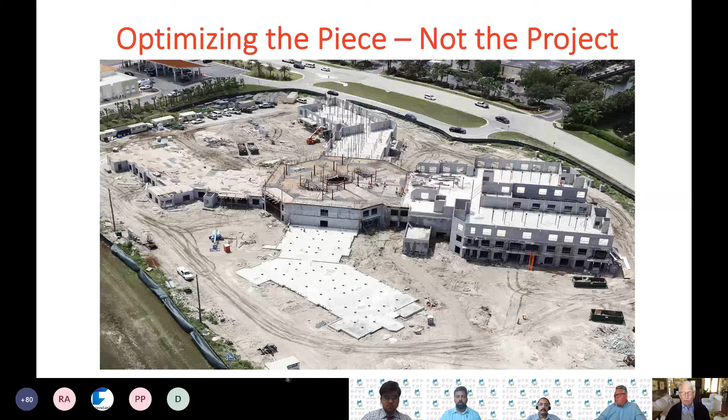So they took up about half of the schedule and left the rest of the trades a shorter schedule to try to get done, which leads to that overburden that Tony was talking about. This is another instance of too much focus on resource efficiency.

This project, nobody understands why. It was down the street from one of the projects I was coaching. It was a large multi-use site, 6 or 7 different buildings to go in, about 5 stories each, but they put up all the columns first, and they didn't follow that with slabs on top of the columns. There was nowhere else for anybody to go to work because they were trying to maximize their resource efficiency.

A direction through the building would be chosen, and every trade would follow the previous trade in that direction, and it would be smooth and things would get done very well. But often things go wrong with that, and we call that variation.

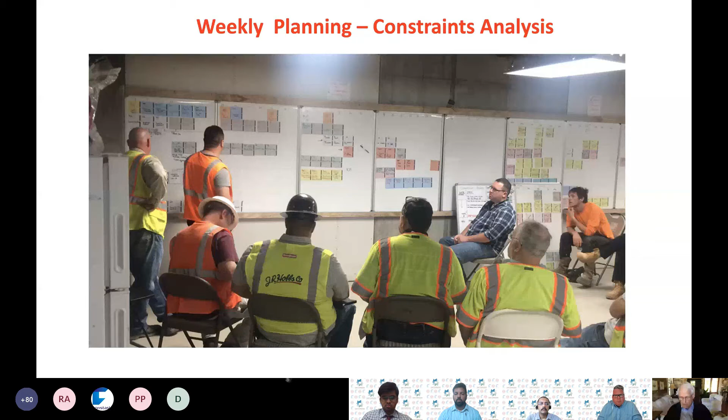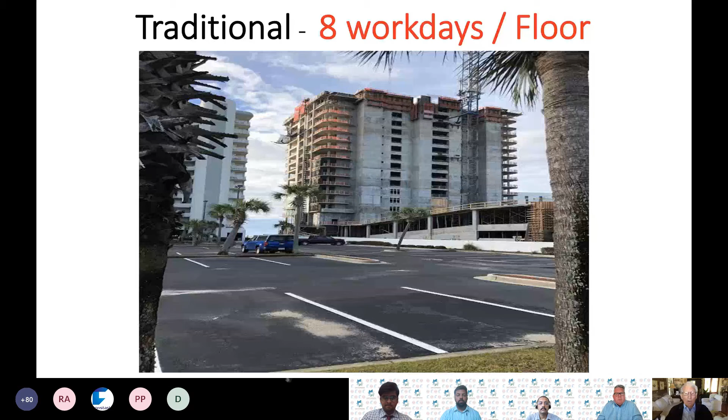This is a project I coached, a company that had not been doing lean at all, and they were raising this building 1 floor every 3 days using lean and the last planner. So 1 floor every 3 days — it goes up very fast.

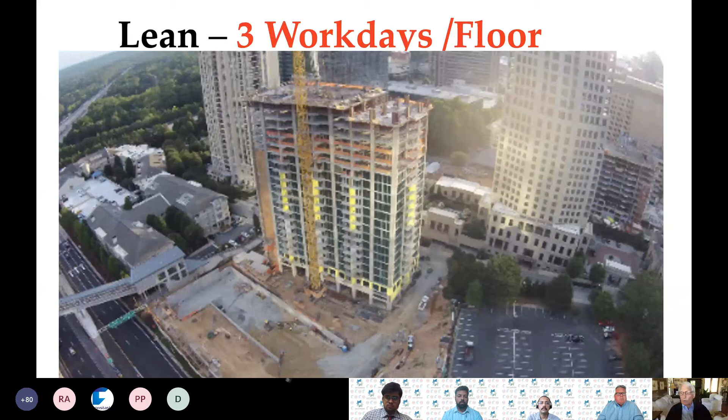In the background to the right, behind the tall building, is a building of the same size and the same height, which started first. The project in the foreground is 10 floors ahead of the one in the background, who were not practicing lean.

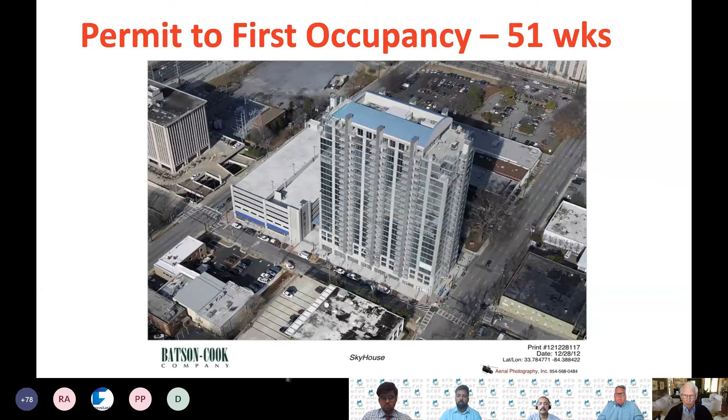The other contractors in that city did not believe that, but yet they built it in less than 12 months — they built it in 51 weeks. And this was the first time they'd ever tried to use lean processes and thoughts.

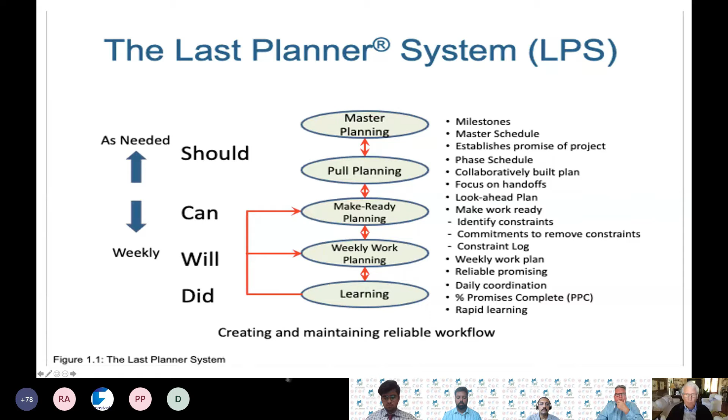And those are the levels of the last planner system. So I'm going to show you some pictures of people practicing the last planner system. The first level was the CPM, and what I like to do is get the superintendent and his assistants on a project to first convert that CPM schedule into a milestone schedule, and just the starts and finishes of each phase of the project.

Often, and most often, when a project in the U.S. gets started, the superintendent and the project manager and their assistants, they arrive at the project at a different time. Usually the project manager knows the schedule and everybody else has to learn it. They learn it in different degrees.

So what we do is have the assistants make up a milestone ticket. That's a diamond-shaped ticket. We have them make up a ticket of the start of the concrete, the finish of the concrete, the start of the exterior, the finish of the exterior. And we have the superintendent place it on a time scale sheet of paper. So it becomes a visual understanding of what that complicated CPM schedule says. It becomes a visual picture, and all of these men that are doing this together begin to understand the project together in the same way.

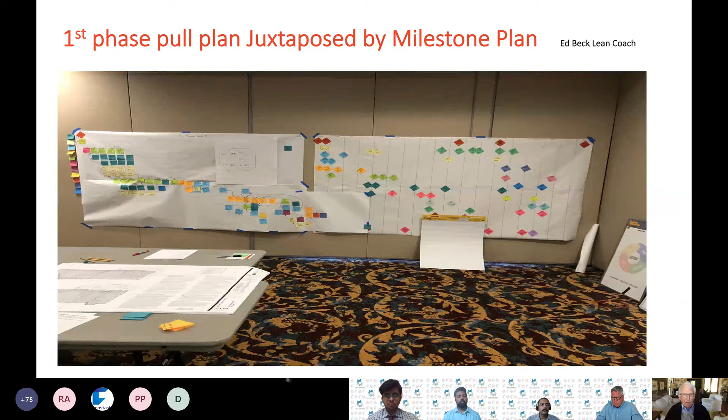So that's this session again. They're planning the order of handoffs between trades, between the plumbers, the electricians, the concrete people, and they're all thinking this job through together. This is the second level of that diagram we looked at.

This is phase planning, or what we call pull planning. This is a very simple use of it. There was a particular project that I helped with, and they couldn't get started because they had a number of temporary roads around the project.

while they moved utilities in front of another building. So we defined, at the left-hand side, 4 different bottlenecks that were keeping them from opening up the site where they could excavate it. So we made a milestone of those 4 bottlenecks to complete them. And then we looked to the right of that and said, what is the last thing that has to happen before we get to that milestone?

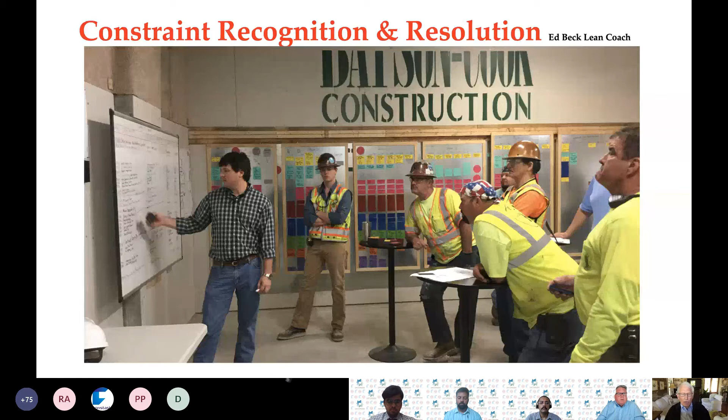So here's a couple of kinds of boards I like. The one on the right is a constraints board. Every time something comes up, we put a date and an activity description, and then we put a person's name who's going to resolve that constraint, and we put when we need to have it resolved, and therefore people leave that meeting knowing they've got an assignment to clear that up.

The board on the left is what I call a bottlenecks board. A bottleneck is the slowest operation in a process. So, for instance, if an electrician doesn't have enough people, then everybody that follows that electrician is going to be delayed. And so we teach people to try to look for those bottlenecks and put them on a board just like constraints and try to help that bottleneck speed up.

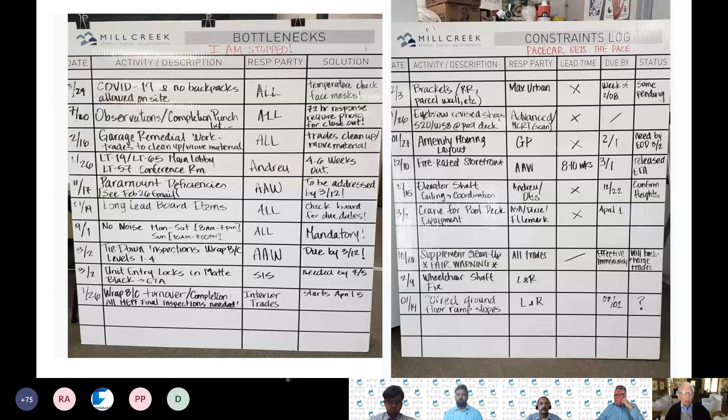Tony talked about these things this morning. This is a diagram that shows you can't start an activity if you don't have the D, P, and the R. The D stands for directives, information. The P stands for prerequisite work, and the R stands for resources.

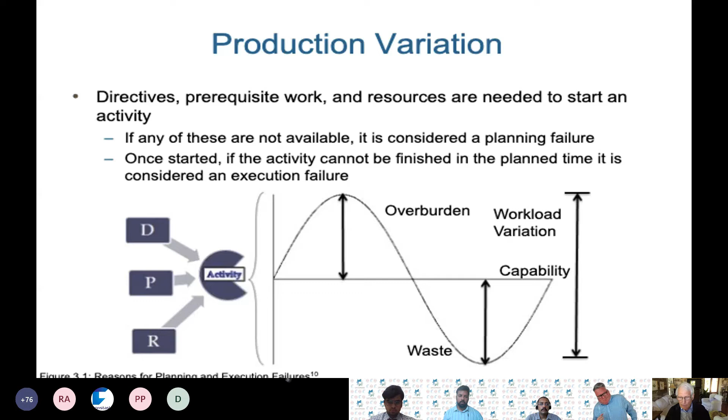A task that doesn't have all those three things shouldn't be on the plan if it really can't be done. So once it gets on the plan, if there's too much work, if it's too crowded, that's when the work planned is greater than the capability and the team is overburdened. If the capability is greater than the work that has to be done, then we're wasting resources.

What we're trying to do with the last planner system is to align what should, what can, and what will be done. And at the end of the week, we can say, we did it, we got it done.

So these big rooms that have all the planning boards on them should also have a key drawing of the project that shows the direction of flow that all of the trades agree to. This is a 42-story building in the United States, and these arrows represent the direction of the flow that each trade will take when they go through the building.

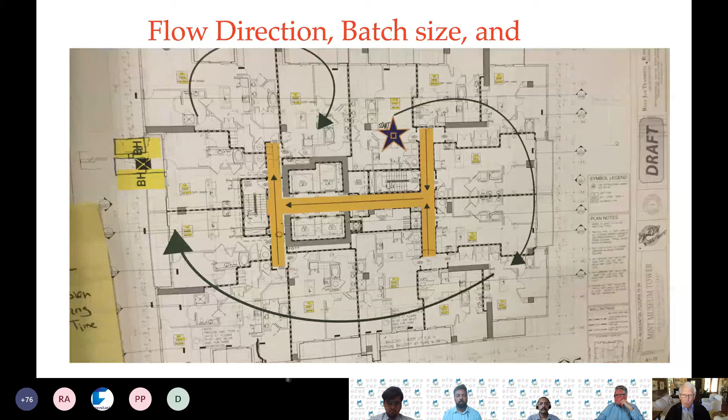So again, I want to look back at this job that's doing all of the last planner components, all of the requirements, all of the things that I taught them to do, and they are 2.5 months ahead of schedule because there's not a lot of waiting between trades.

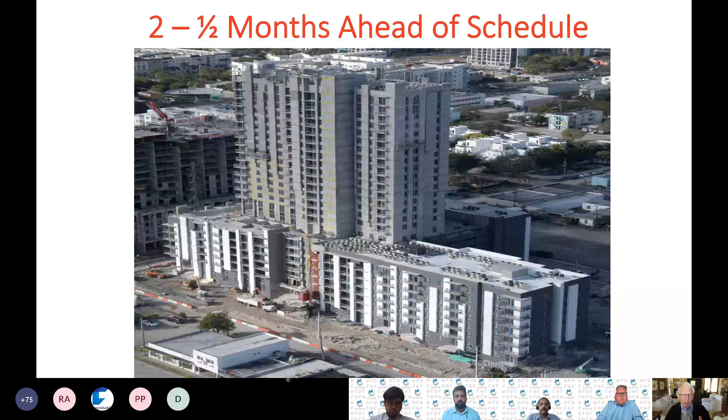They're all working there together, and we have something we call a PPC, and a PPC is the percentage of what we planned which was completed, the percentage planned complete. Measuring the PPC each week is not measuring how much work is getting done, because different activities have different numbers of people and equipment that need to work on them. What the PPC is measuring is how reliable of a plan did we all make together.

If we made a reliable plan that others can depend on, and we keep monitoring this with the weekly meetings and the daily meetings, the higher percentage of these that we get done indicates how well we're going to do with the schedule. We say that if a PPC is consistently above 80%, we will finish early, we're on time or early, and we will make money.

And in this particular project, 2.5 months early, they never had a PPC—they only had 2 PPCs under 80%. All the rest were between 80 and 100. So they were making very good plans with each other because they were talking to each other, they were listening to each other, and they were trying to help each other.

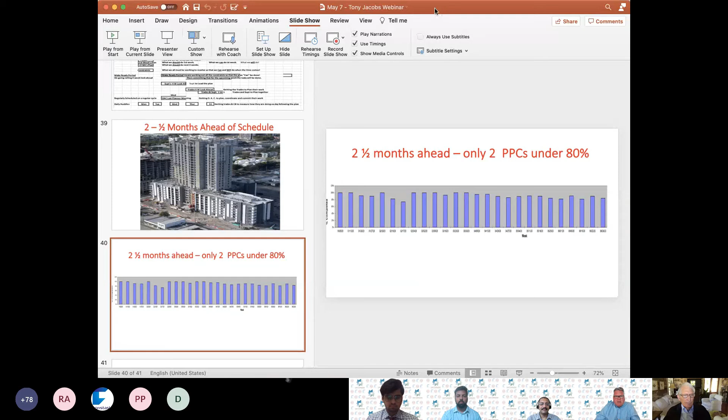But what's the difference between like a Lean Six Sigma or Lean manufacturing and the Lean construction?

Well, what I like to say is we construction people are manufacturers. We just move our factory around. And lean manufacturing is an antidote to mass production. Mass production is the way industry in the world has worked for 100 years or more. In mass production, we have believed that the more of something you do, the cheaper the price. So when the Model T Ford was put on the assembly line, the purpose was to get the cost down so people could afford it. And they did that.

But we have found, Toyota found, that there's a lot of waste in mass production. And all of this lean comes from an understanding we gained of the Toyota production system, which learned to identify bottlenecks and other wastes and eliminate them.

So I can't answer the question about Six Sigma, but it's more connected with industrial projects, industrial production, but it's trying to do the same thing. It's trying to have a good workflow with less waste, focused on delivering value to the clients. And I don't know if you know this, but after World War II, Toyota said, in trying to rebuild their industry...